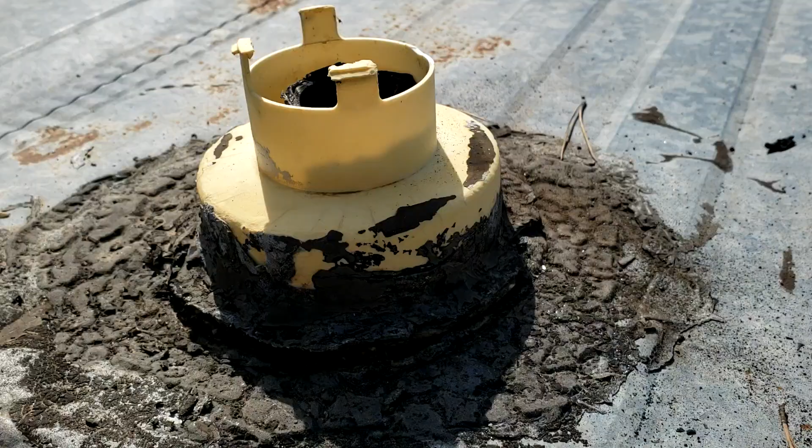First, let's get down into it and see just how big it's going to be. So as I started prying around on it, I learned one thing really quick: the screw holes and everything that was holding it down broke out a long time ago. It was just the sealant holding it down.

So I'm going to get this cleaned up, and in the meantime, while that's getting cleaned up and everything's getting set up, I'm going to take this out there, go into Tinkercad, and redesign it.

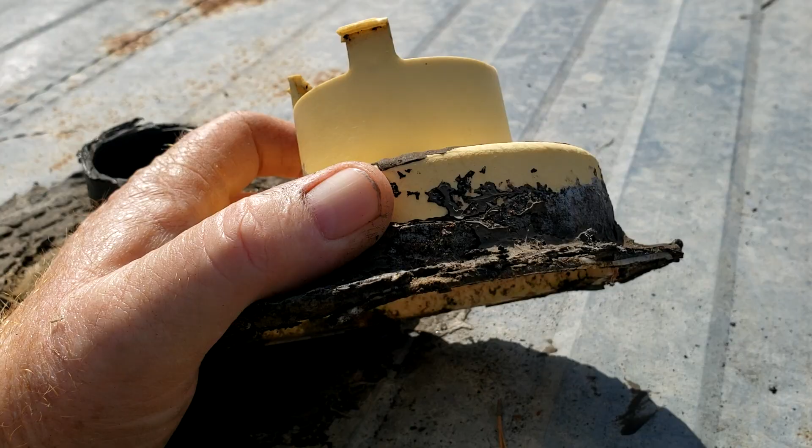So I'm going to go in here and try to redesign this thing. I'm trying a whole different way of recording this, using the screen capture and everything. So let's get into this and try to figure out how to design this in Tinkercad.

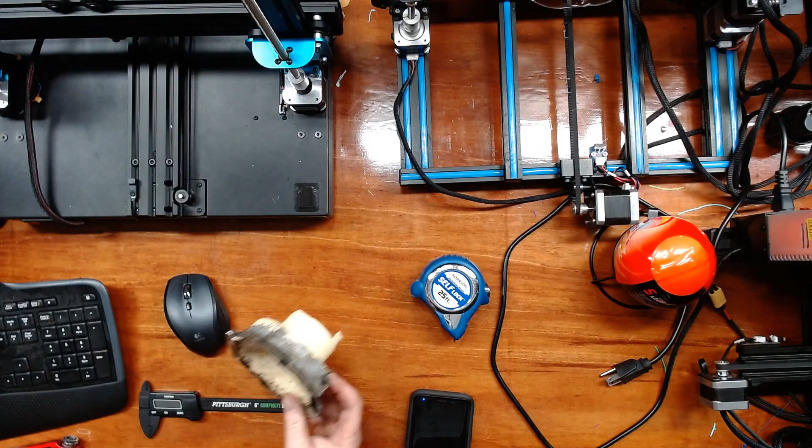So this is the part I'm going to redesign. It used to have a fourth piece sticking up right here, with a cap that clipped down over it. I don't necessarily have to go with that design -- it's just a vent cap is all it is.

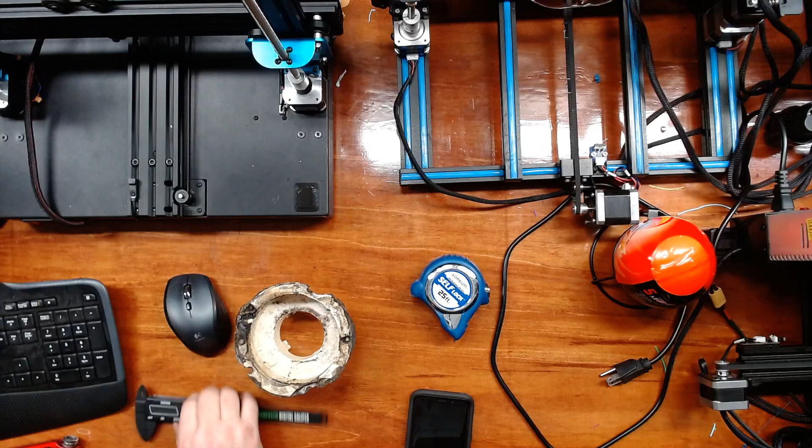So the first thing I've got to do is get some measurements. I'm going to turn on my device here and get a rough estimate. And right now -- oh, that's sacrilege, that's inches. There we go. That should give us a pretty good indication.

So we're right at 135 millimeters across on the base. This portion is 107, 108, doesn't matter. Up here, 64, I believe -- close enough, 64. And then the clips were at 64 as well. And the little bump-outs from what's left of it appear to be about 68.

Main thing is going to be the inside of this right here. You've got to make sure it's big enough for the pipe, which is going to be 60.5 millimeters. So using those measurements, let's go into Tinkercad and see what we can do.

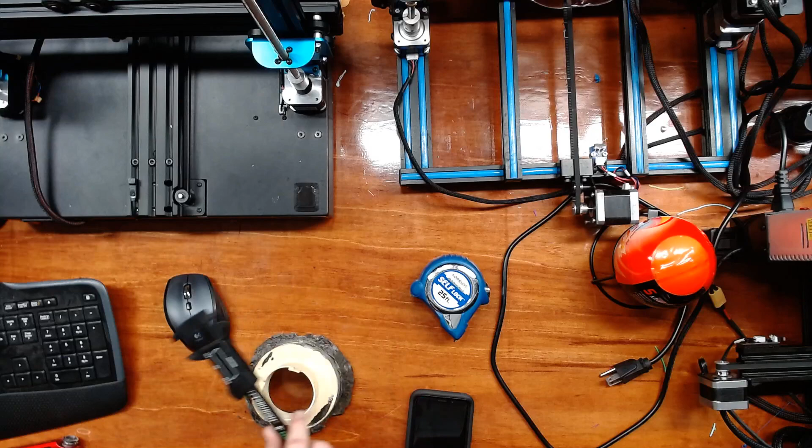Okay, so over here is my favorite program to design everything I do, and that's Tinkercad. It's one of the easiest, simplest ways of doing it. First thing I want to do is, I don't want to get everything complicated, so I'm just going to put down a roof cap.

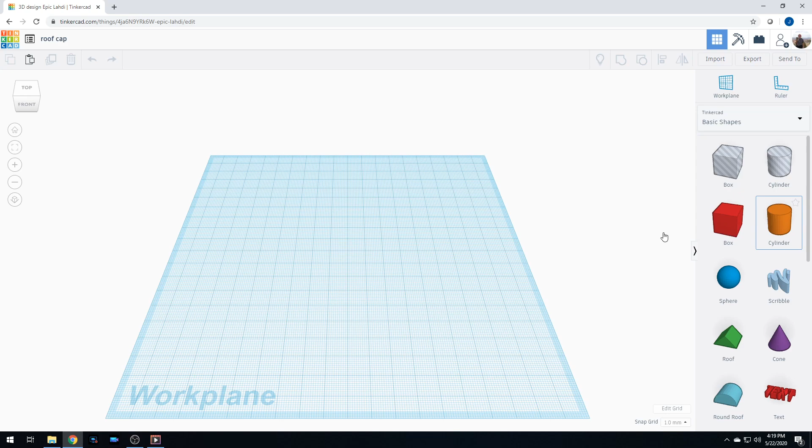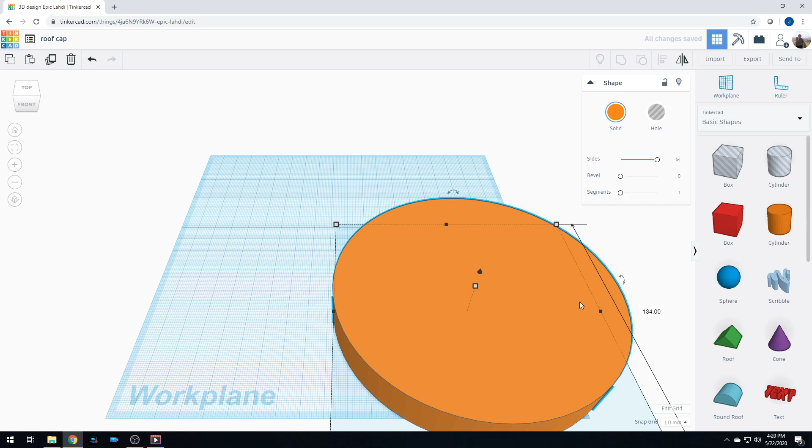There we go. So first thing I'm going to do is start out with the cylinder. We're going to drop it over here. We're going to take this cylinder and give it all the sides so it's nice and round instead of having little beveled edges all over it. So across the base we're going to do it at 134 and 134. By rights I can make it 135, it would not matter.

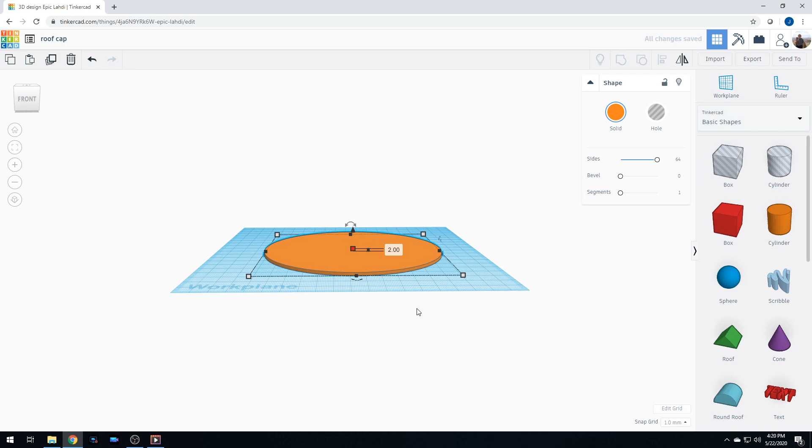We're going to take this and narrow it down -- oh, wrong one. Just put that back to 0. We're going to take this one, drop it down. We're going to need it to be maybe 3 millimeters tall. As far as the thickness, I could actually go less than that -- let's go 2 millimeters. I have a trick I'm going to pull on this, and hopefully that'll make it last a little bit longer in the weather.

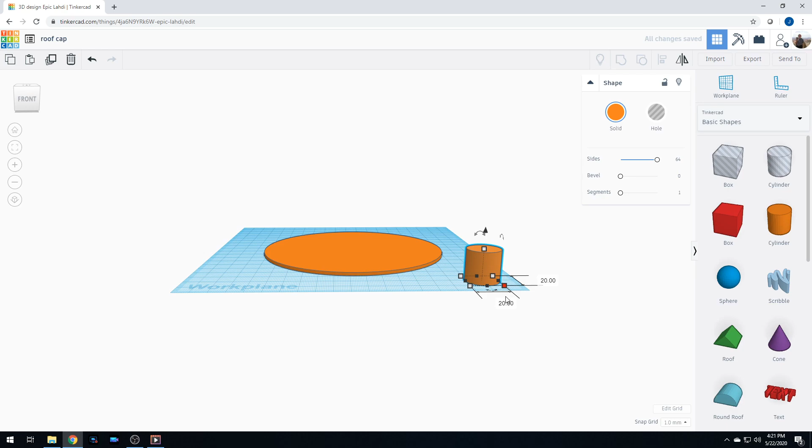Okay, so the next thing we want to do is add the center section. Now the center section is going to have a slight bevel at the top of it, so we have a way we can take care of that. What we're going to do is take this cylinder here, drag it over. Now for that part of it, for the outside, we want it to be 108 millimeters. So once again, we're going to increase our sides to make it smooth -- change that to 108. We're going to bring that over and set that somewhere in the middle. Does not matter at this point.

Right now, I didn't measure the height of it, but let's go ahead and measure the height. Right now I'm sitting at 35 millimeters tall. So we'll take that, 35, and then, actually we've got to remember we've got 3 millimeters -- was it, on thickness? 2 millimeters. So by rights, we need that to be 37.

Nah, that's right, 35. What am I thinking? It doesn't matter because I'm measuring it from the base of it anyway. There we go, 35 millimeters.

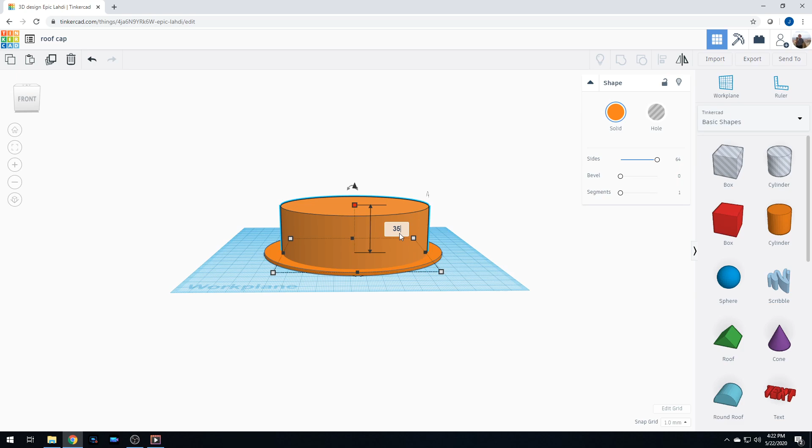Now I want to give this a little bit of a dome. So I can either add another part in here, or I can just select on that. I believe if I do bevel, I can create a dome. Now by doing that, you can see this little blue line here means I'm no longer where I'm supposed to be on that. So because of that, I am going to go 37 millimeters, and then I'm going to drop this down a couple of millimeters.

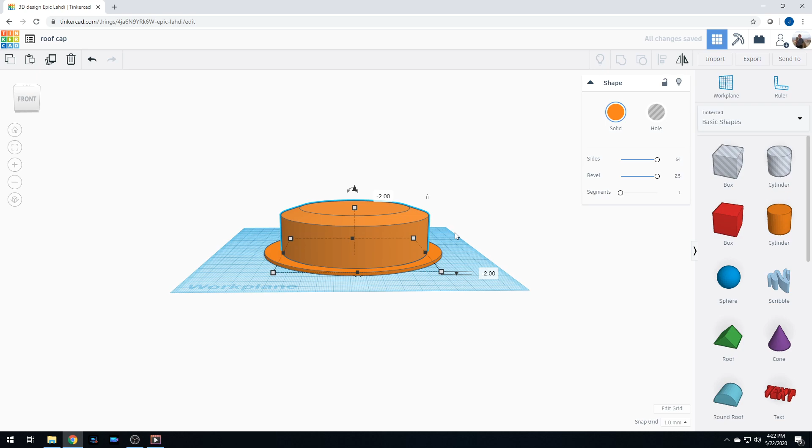Later on, I'm going to put something underneath here to completely flatten it. But that gives it a little bit of bevel. It's probably not enough, I don't know. Let's find out whenever I put my other piece on there, which is supposed to be 64 millimeters.

So I'm going to take another cylinder. This one, well first let's go ahead and do our sides. 64, 64. Once again, this is all millimeters. From bottom to top, 66 millimeters tall. So I'm going to take this,

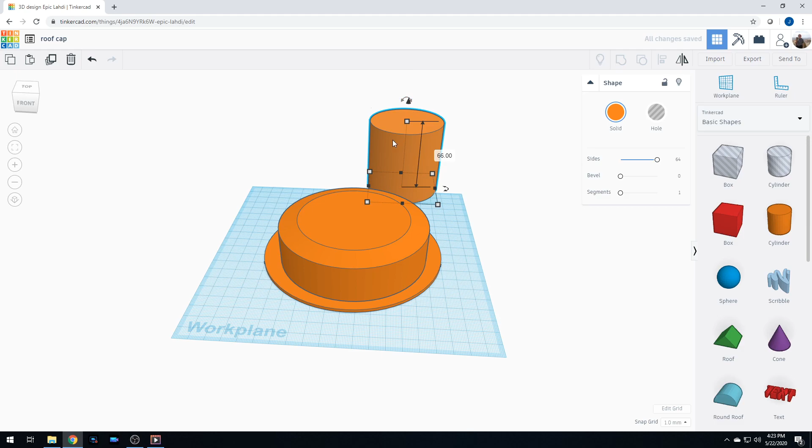66 millimeters, I'm going to bring that over here into the center. That's actually not bad. Now what we're going to do is we're going to line everything up. Now at this point, I've got a wedding cake. That's not what I want. I don't want a wedding cake.

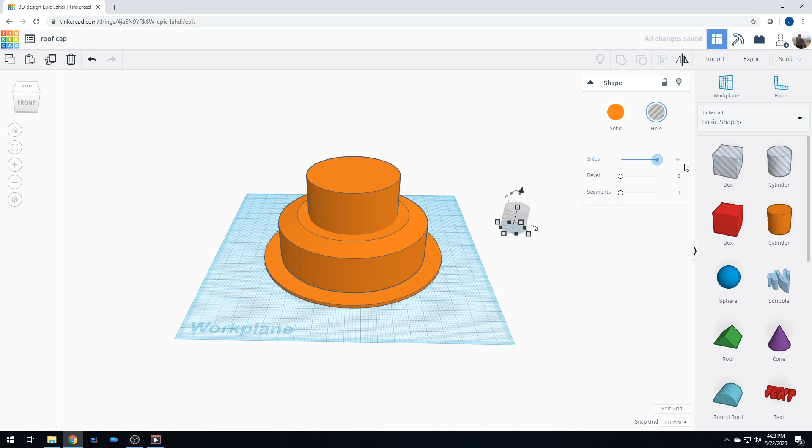So what I'm going to do is I'm going to take and hollow this thing out. Now for the inside of the top portion of it, it's about 60 millimeters. So I'm going to take a hollow cylinder. I'm going to once again round off all the sides. Let's do it 60, let's just go 61 and see what that looks like. 61, make it tall, we're going to stick it in the middle.

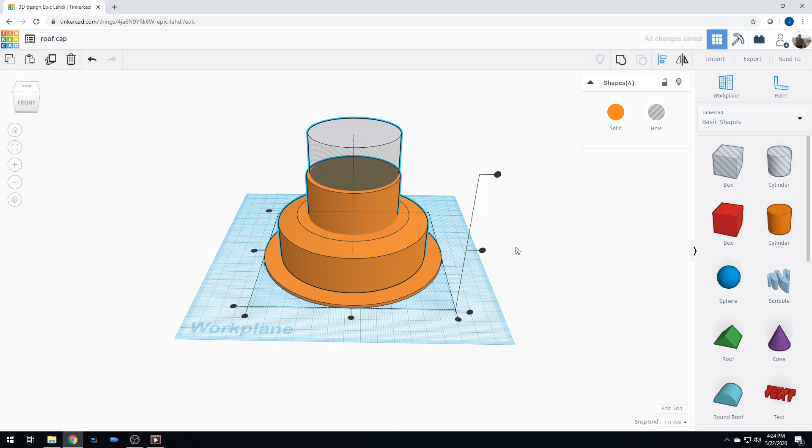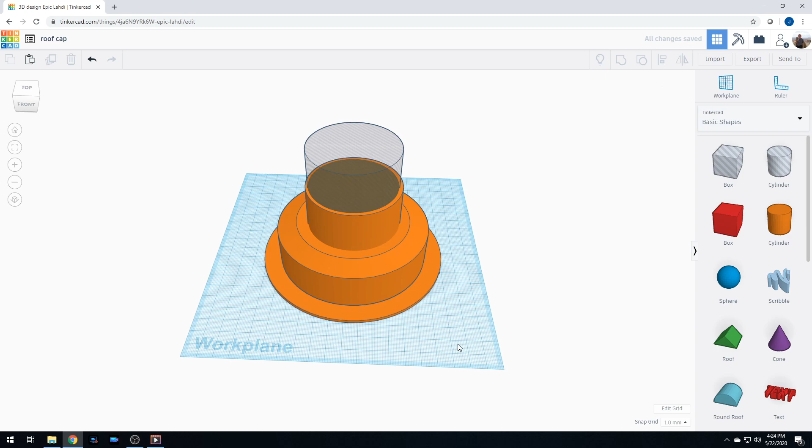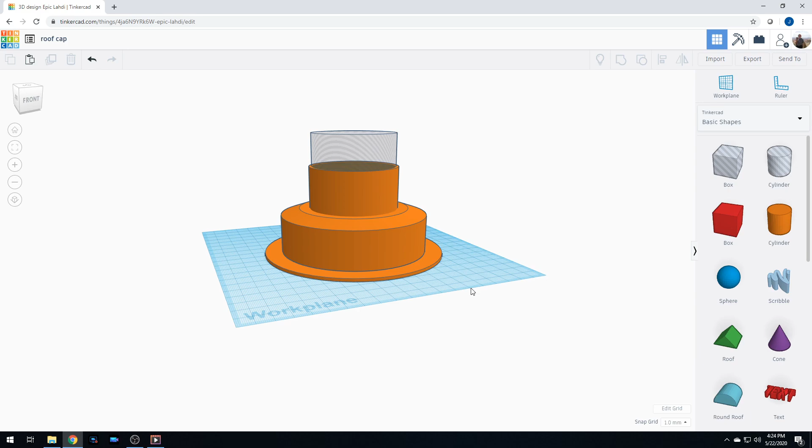And then I can take this, drop it down a little bit so it goes underneath, and now it's sticking out the bottom of the build plate. The build volume, or however you want to say it. Not the build plate, but on this is the work plane, I guess you call it.

So the next thing I want to do is I want to go ahead bigger. Why, I really don't know, because technically it's going to slide over the pipe, but for intents and purposes, we're just going to go ahead and do that. So this piece was what? 108. So we're going to double check the measurement inside this one, and this one on the inside is 104.

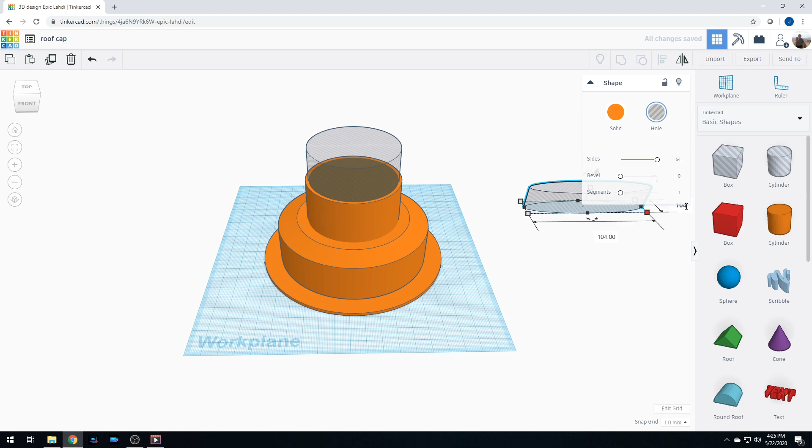104 and 104. We're going to take that over here. This is where I'm just going to take this and eyeball it. We're going to bring it about there, drop it down a little bit, remembering that we got to make sure we're completely through, that we're punching a hole all the way through this thing. That looks good to me.

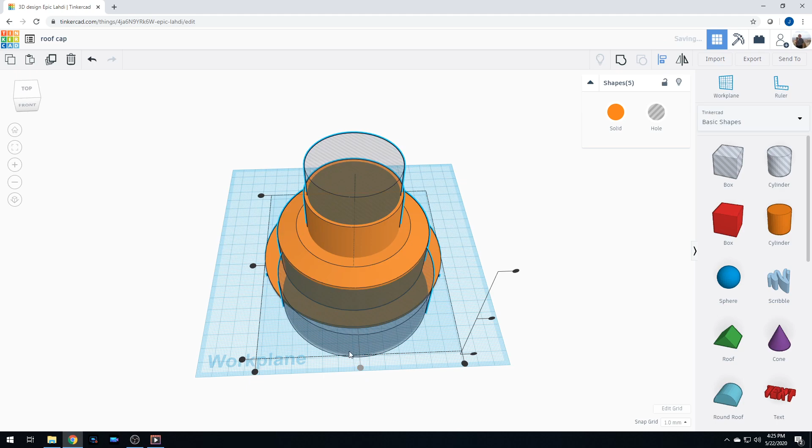We're going to take and align everything, and by aligning everything, it puts it exactly where we want it. Now when we look in there, there we are. Now if we want to see how much area there is between them, we can actually turn this outside hollow. See this width right here? That's our thickness of that material, which to me is just fine.

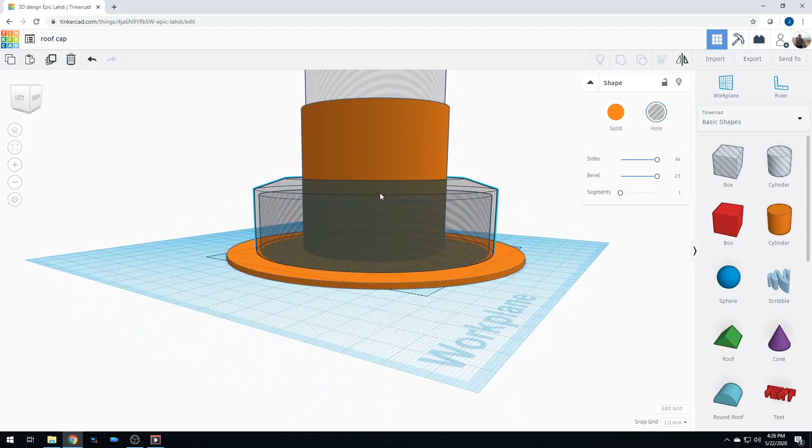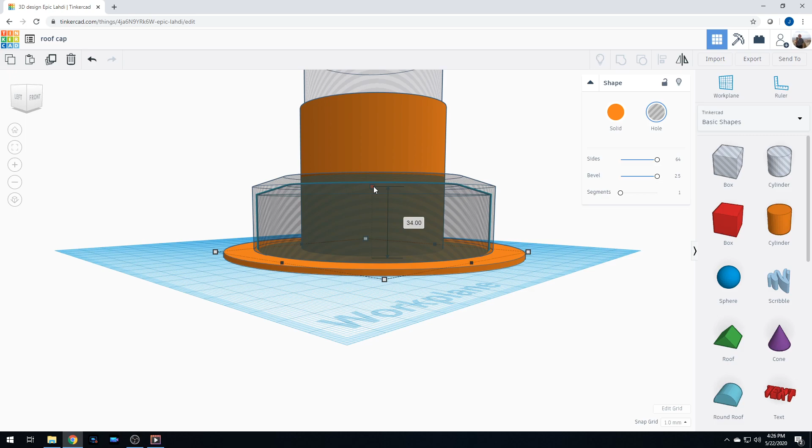As you can see, there's going to be more material under here. Now what I can do is I can take that piece and I can bevel it. And by beveling it, it's going to give it the same taper on the inside, which means now I'm going to just extend this back up to give it somewhat the same thickness. It's going to be a little bit thicker than the sides, which is fine. I like that, that looks sweet to me.

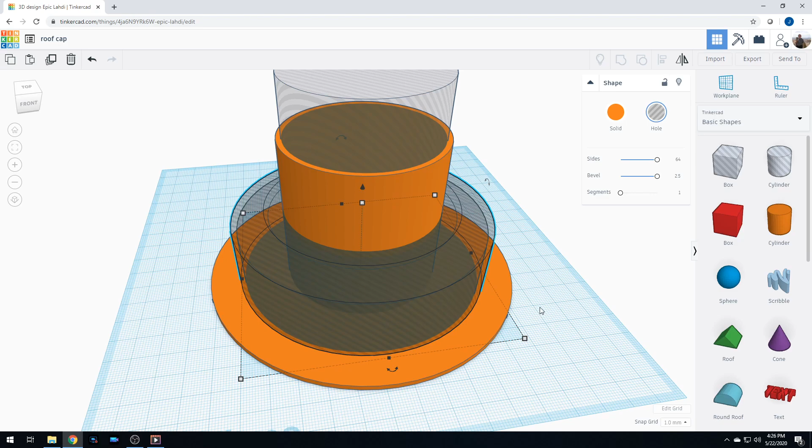Okay, so I'm just going to click this outside because once again the hole's on the inside, which I got to make sure I'm all the way through, which I shouldn't be. Am I? That's easy enough to fix. I can change that to 39. Nope, wrong one. When in doubt, just go back. Click down here.

That will give me that one, so I can go 39. See how it went up? I just want to bring it back down. Give myself about the same amount there. Should be good with that thickness.

It's going to be a nice thick part. PLA doesn't last very long in weather from what I understand, but I got a trick up my sleeve I'm going to try on this.

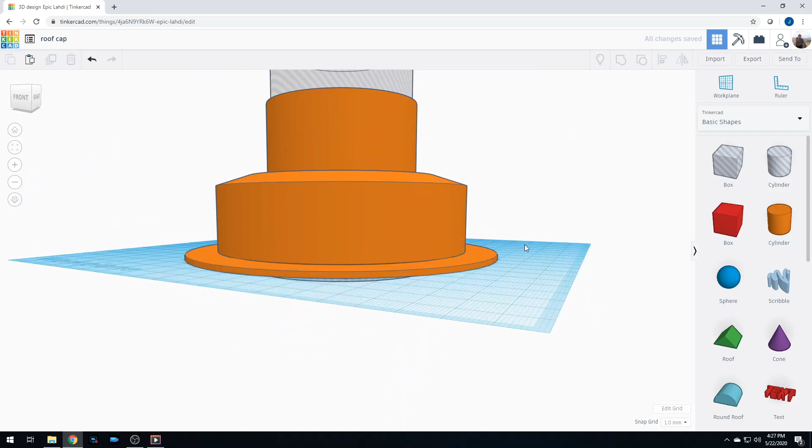Okay, so with that set, I can click this outside one, turn it back into a solid. I've got my hole right there. I'm all good on that. All I need to do now is take a box. We're going to take this box and we're going to extend it out pretty big. Doesn't really matter.

All this is going to do is set below my build plane so that it creates a flat surface, so that when I bring it into my slicer, it's not going to think it's some special thing. I just want to make sure it's at 0, so it's at the bottom of the part. So right now I'm just going to take all this and I'm going to join it.

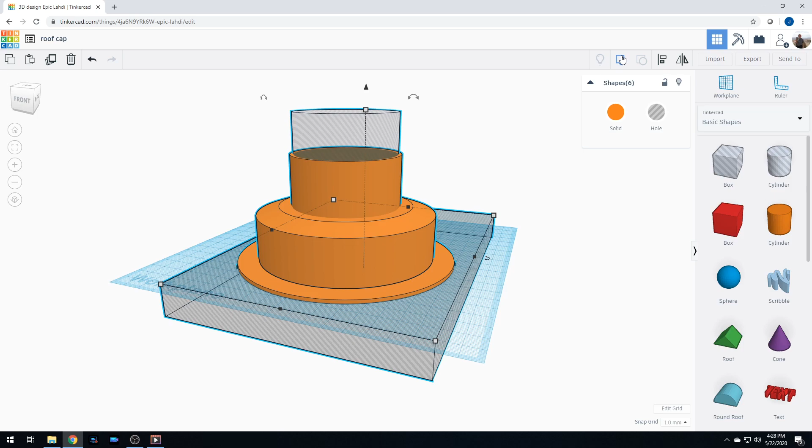Group it. So now you can see what I'm fixing here. That's somewhat like what I've got. And top to bottom, 66 millimeters. Now what I don't have yet are the tabs right here.

So now let's go ahead and play with the tabs. Okay, so the next thing is we want to go ahead and make the tabs, but I'm starting to have my doubts about whether I can do it. And since I really don't need tabs, all I need is just the cap to fit on this thing. But I just need it so it can get air.

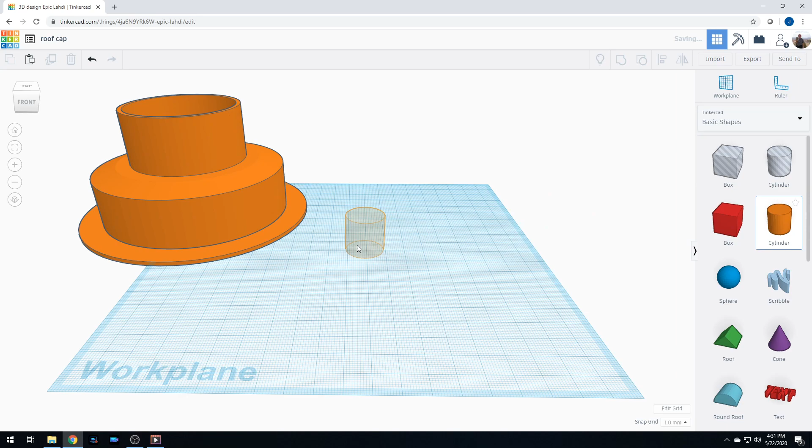Let's just go ahead and make the cap. Just push this off over here to the side. Let's go ahead and make a cap that'll fit this thing. And since I don't have a cap to go by, we're just going to go by whatever we think is going to be alright. I'm going to go ahead and give it a taper, a bevel. And so the outside of the whole thing was...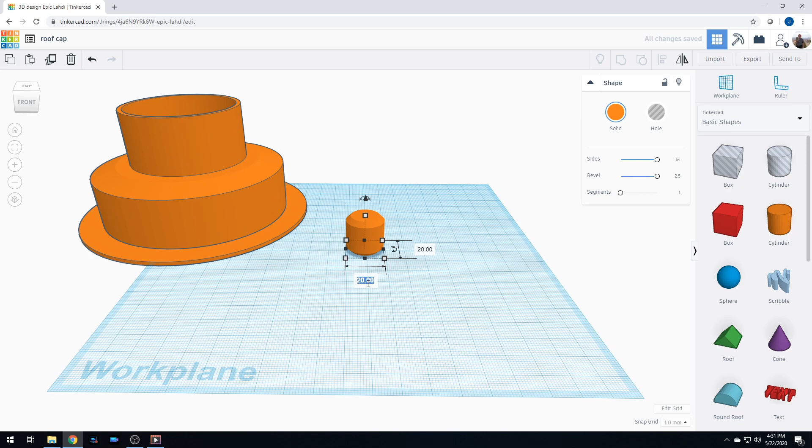My thing's turned off, let me turn them back on. I believe this is 108. Yeah, this is 108. So let's go ahead and do 108 by 108.

It's probably a little bit too big by rights. Yeah, it is too big. Let's narrow that down. Let's go 100.

Not that that's going to be tremendously smaller. I just want to see how it looks on here. Okay. At one time that's probably what it looked like. Something like that. So let's bring that back down to 0.

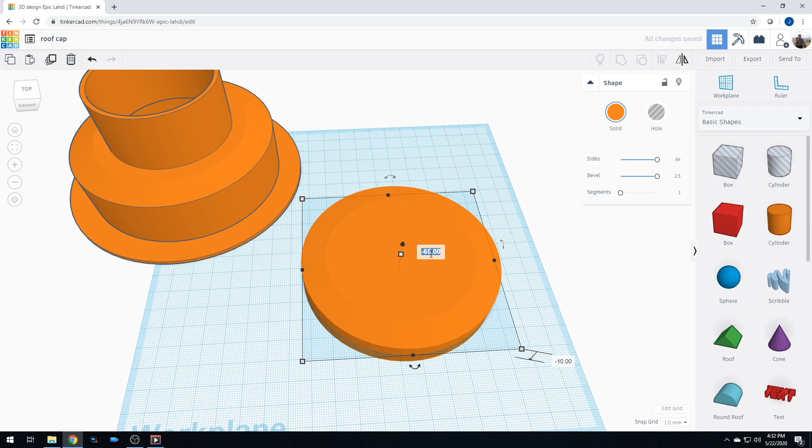Oh, come on. There, bring it back down to the build plate. There we go.

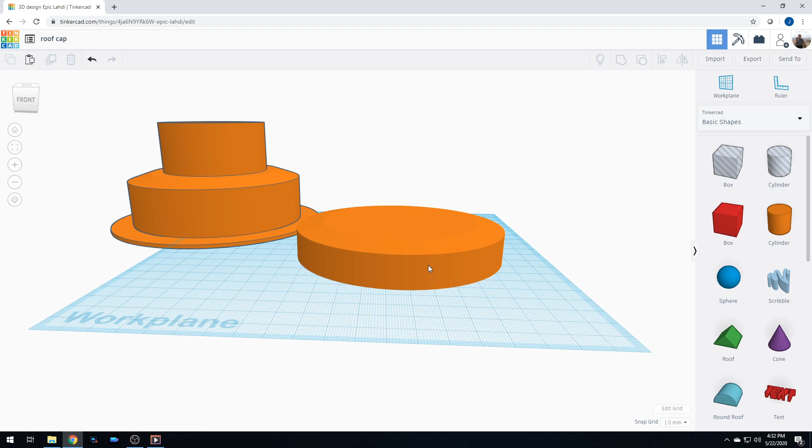So I think what I'm going to do, I'm actually going to make this a little bit taller. I'm going to make it about 30 millimeters tall. And then I'm going to put a hole in this thing. It's going to be slightly bigger than the 64 millimeters. So we're actually going to make that hole...

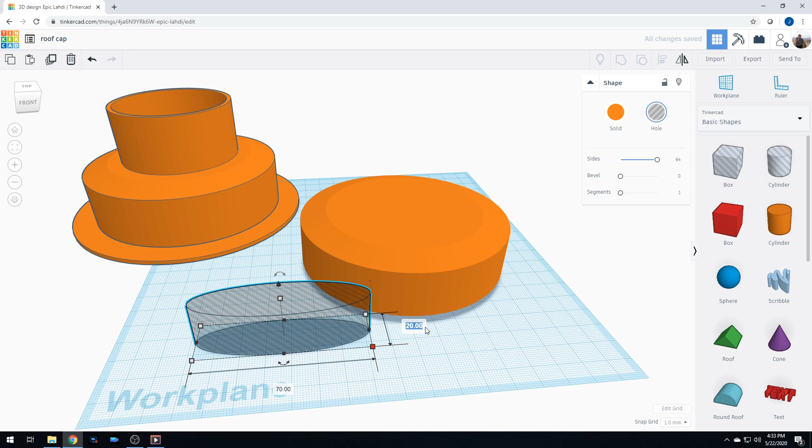Come on, there we go. We're going to make it 70 millimeters by 70. We may end up making it bigger than that.

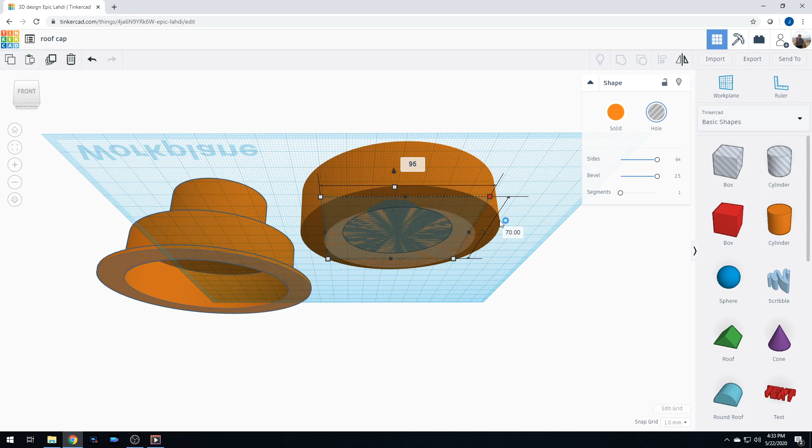Oh yeah, let's go ahead and bevel that thing. Just for... yeah, it doesn't need to be that, it does not need to be like that. What was this one? This one was 100, so let's make that one 95 and 95. And then we're going to group or align it.

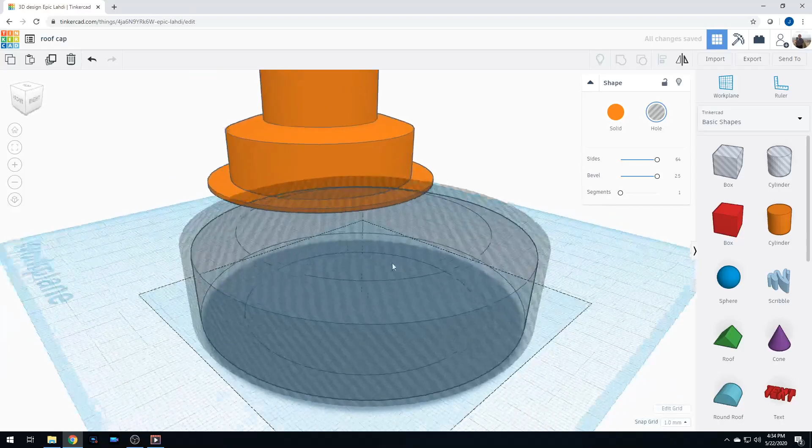Let's turn that into a hole, see where we're at. It's going to be a nice heavy duty cap right there. Okay, that's doable. I like that. So let's go ahead and turn that back into a solid.

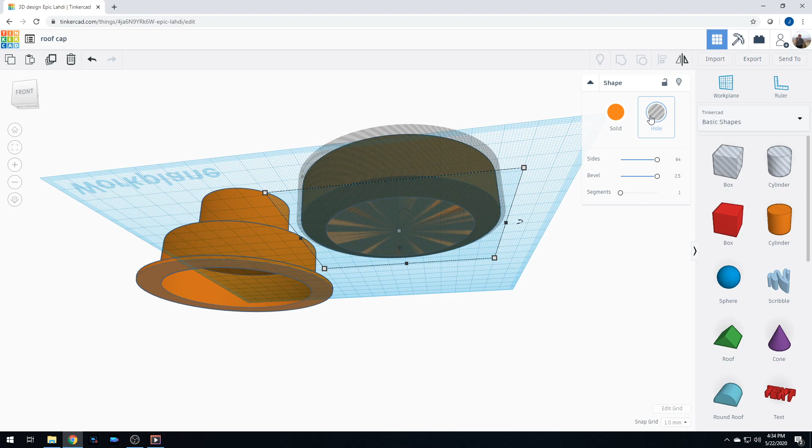Oh, wrong piece got turned into the solid. That would be bad. Hole. Uh-oh. Oh no, that's easy fixed. Click the outside, bring it up, touch that part, turn it into a hole.

Take that, bring it back down. Now that's the inside I'm taking down. Back down to 0. Click the outside, bring it back down to 0. Nope, just want to do that part. Make sure that we're even, which we are because everything's grayed out. Turn the outside back into a solid.

What in the world's going on here? Why is it doing that? You're a hole, you're a solid. Go back home. There, now you can be happy.

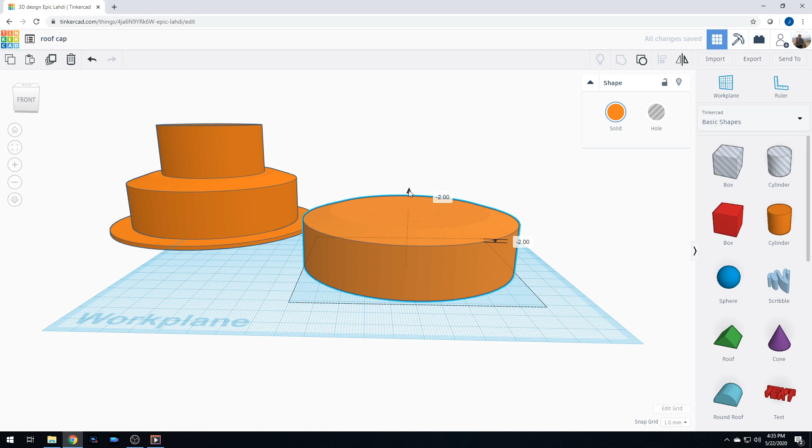So we're going to go ahead and take this, go ahead and group it really quick. We're going to drop that down even with the build. Let's see, let's take it down a little bit further. There, that'll work because I want to go ahead and flatten that bottom on it.

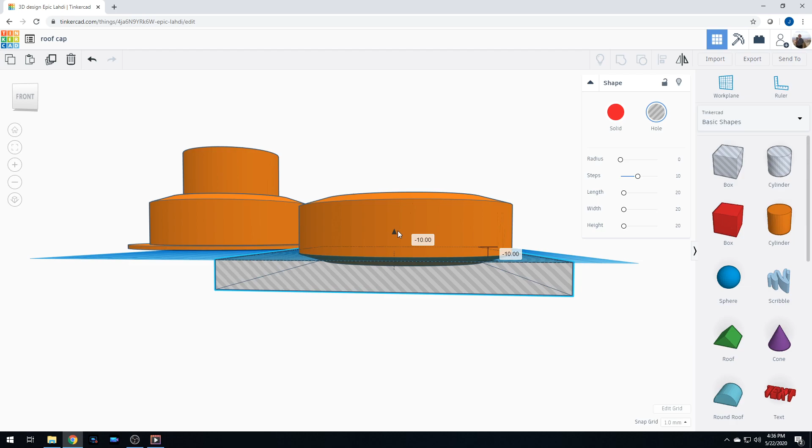Ever have one of those days? There, I think that worked.

That looks like it's even. So now we'll go ahead and group. Now we're nice and flat.

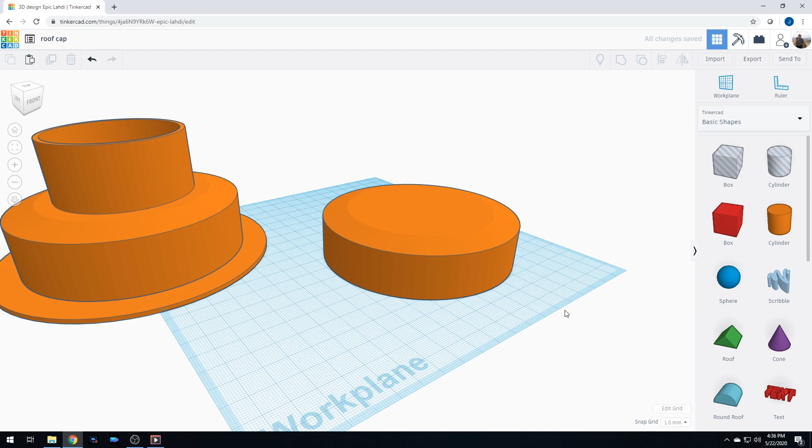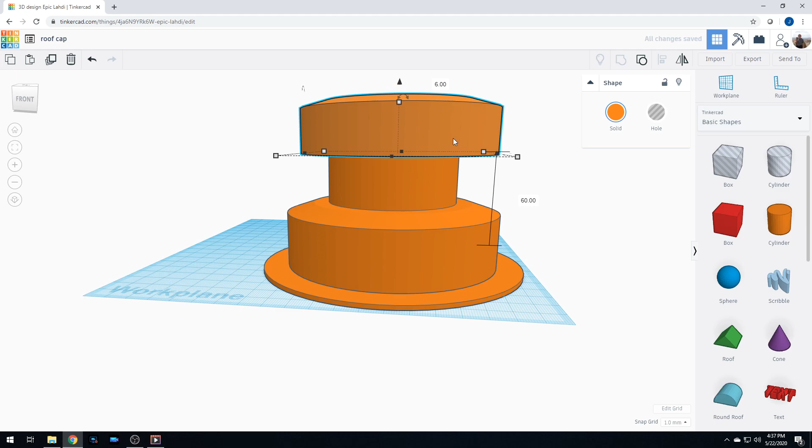That will work. Okay, so now I've got a cap. I've got this piece here, but now I need to make sure that the cap is high enough so that it can get air. So I'm just going to center those pieces there, and now we're going to work on making the cap. Actually, it might be better if I just do it this way, so you can see how much air.

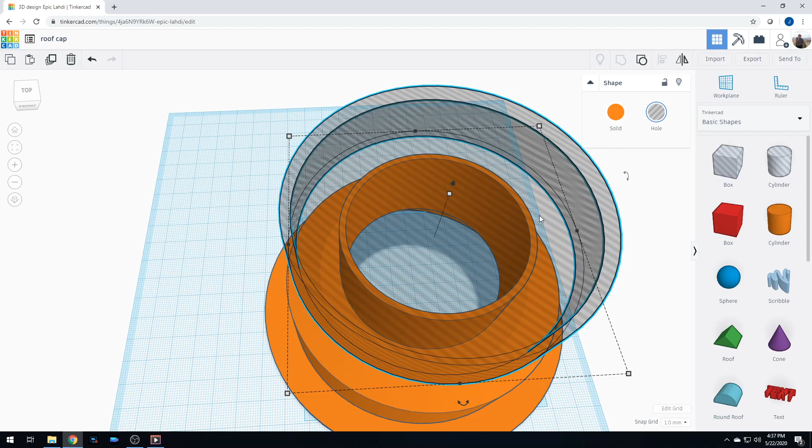When you look right here, you see this nice clear gap right here. That's how much air gap there is between it and that, and you can see where it is compared to the top. By rights, I can bring this down just a hair further. I honestly don't know why I need to, except to keep water out of my house. Anyway, you get the gist of it.

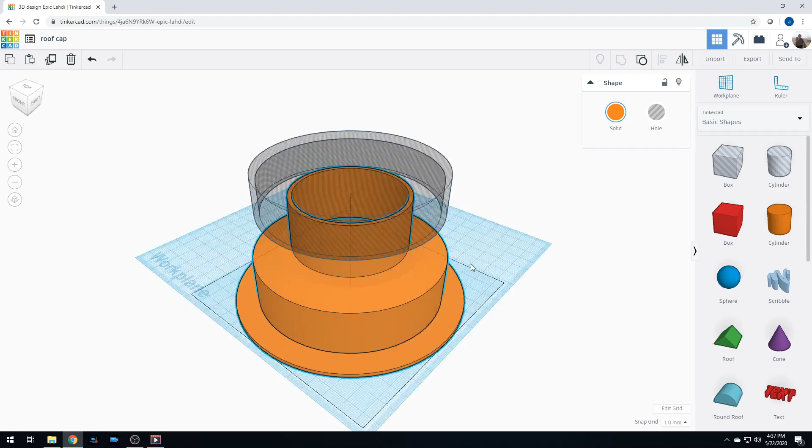So now what I want to do is I want to go ahead and create something in here to make sure it stays in position, because I'm not going to use those tabs. So what I'm going to do is take a box. We're going to make this box nice and thin, like 4 millimeters, and we're going to extend it out.

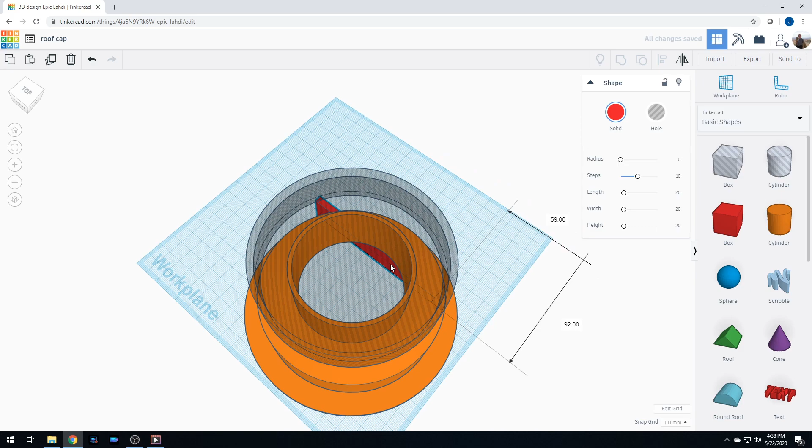And I'm going to figure out a way of bringing it up in here and across. Nope, wrong thing. Yeah, when in doubt, just use the align buttons. It's so much easier.

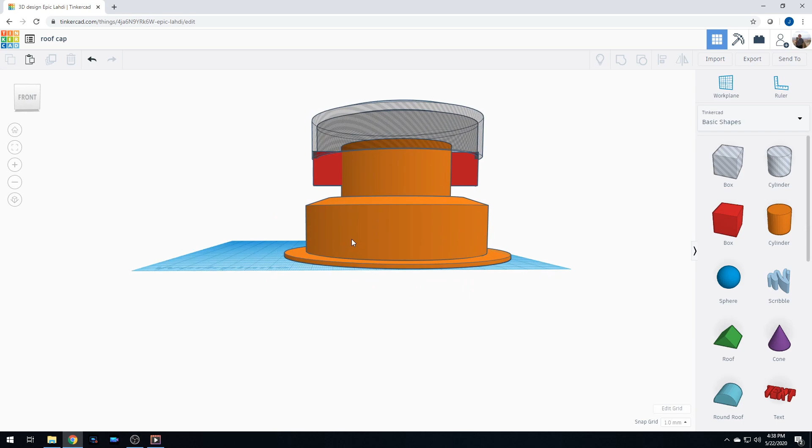So the question is, do I stick out past? Which actually I don't, surprisingly. I don't know how that happened. So if I do it that way, it actually will work. Well, that's strange that worked on the first try.

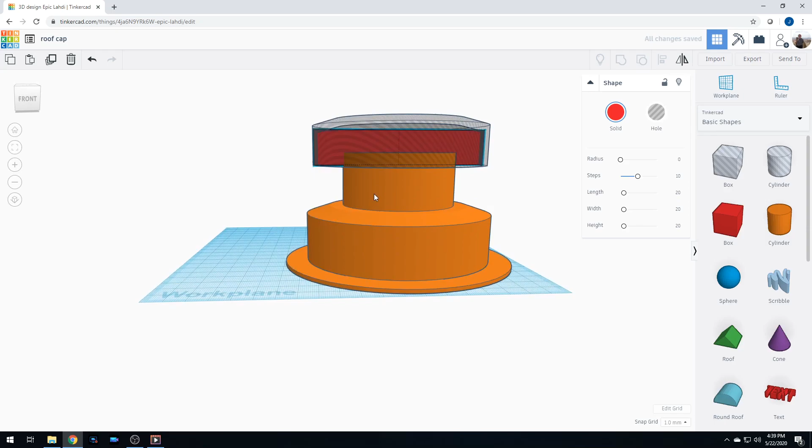Let's actually go ahead and bring it up a little bit. We're actually even with that. Don't really need to do it like this. Actually, no, I don't want to do it like this, do I? That might actually be sweet, though, watching it on time lapse. I think I will do it like that.

And then I'm going to copy it. And then I'm going to rotate it. Oh, let's go back. Let's click that. Copy. Oh yeah, I forgot to paste. Why did I paste there? That's stupid.

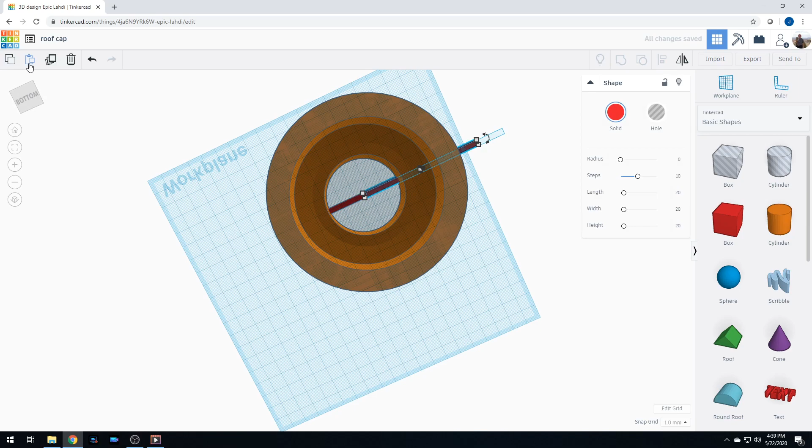Ah, that's weird. Okay, fine. Line there and there. Okay, I'm going to take one of these, I don't know which one it is, and we're going to go 90 degrees.

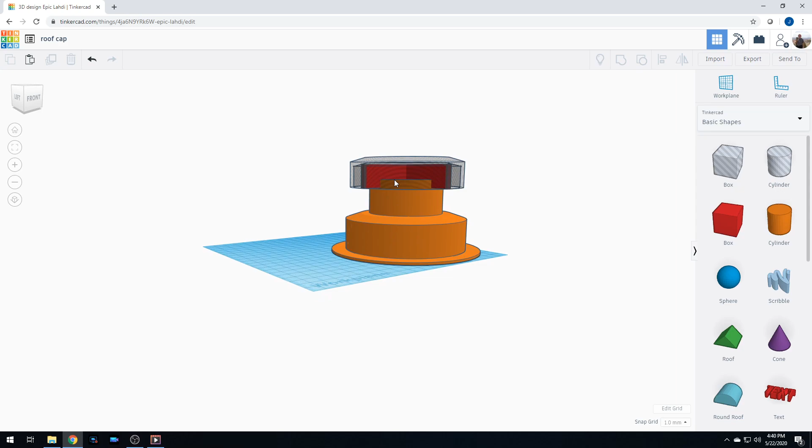That gives me enough air getting in there, no problem at all. With it down at the edge of this, when it prints, I honestly don't know. But you know what I can do is I can just leave it like that and print it upside down. I do have a taper here that might work.

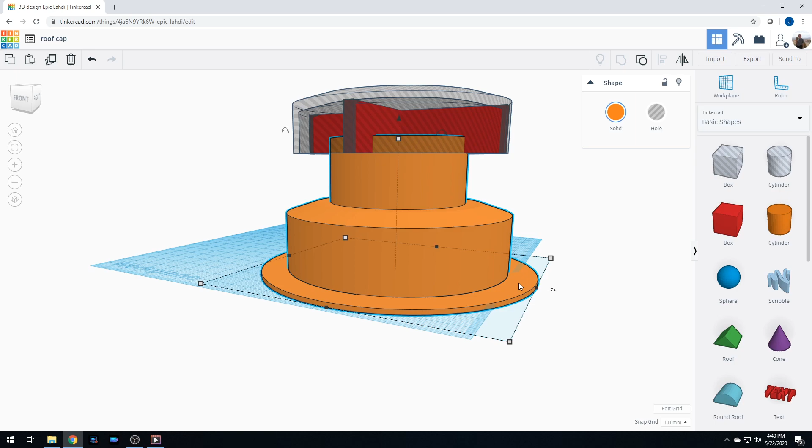I don't have a taper there. I wonder if I could have tapered that. I don't know. I do know this much on this. I've got those way too thick. Those only need to be 2 millimeters.

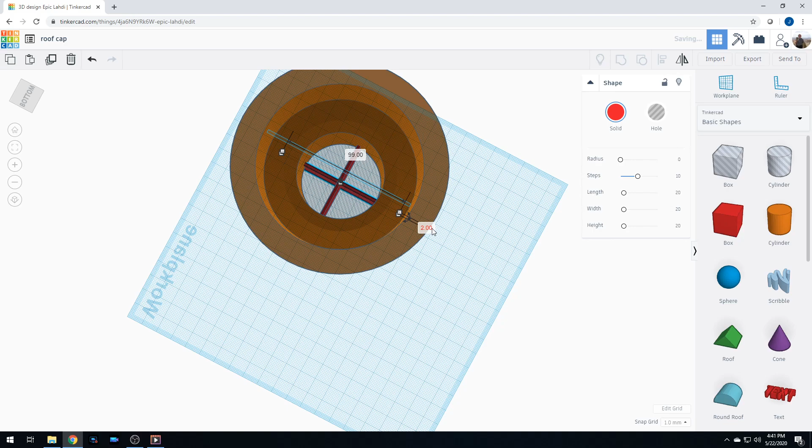There we go, nice and thin. Make sure everything's aligned. That looks stinking sweet. That may just work.

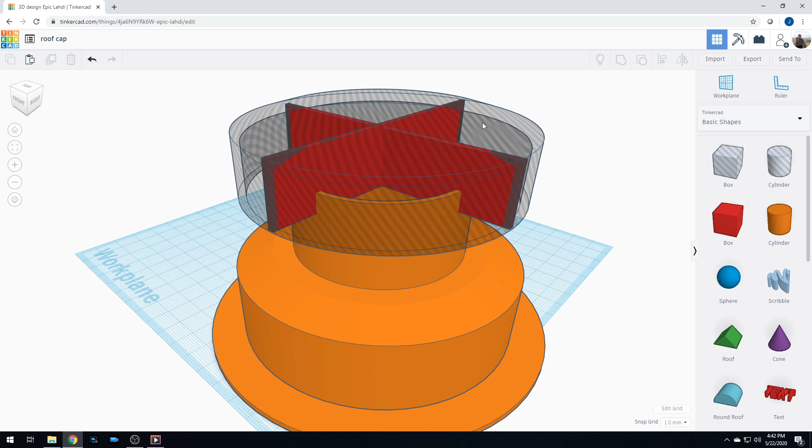So I'll raise that up a little bit more. It's just going to touch, so that way when it starts bridging around there, it should touch on the top of those. That'll be sweet. Cool. Okay guys, I'm going to go ahead and download this monstrosity.

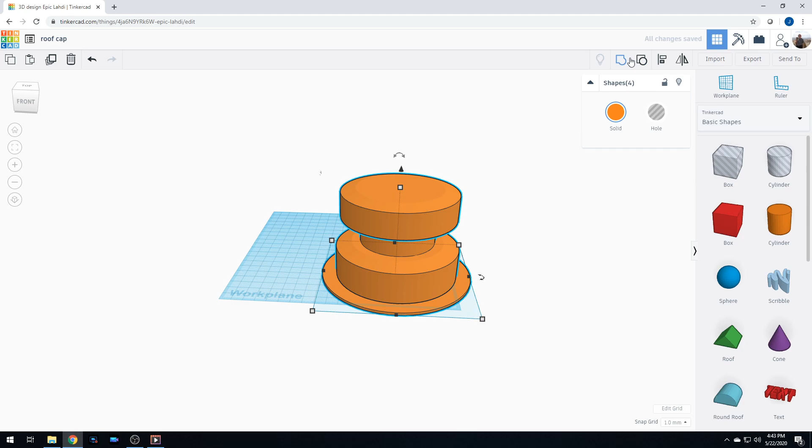Oh no, no! Align, align, align now. Group. Now I've got a part that's 85 millimeters tall. Yes, okay, I like it. Let's go ahead and give it a shot. I'll see you guys at the end of the time lapse.

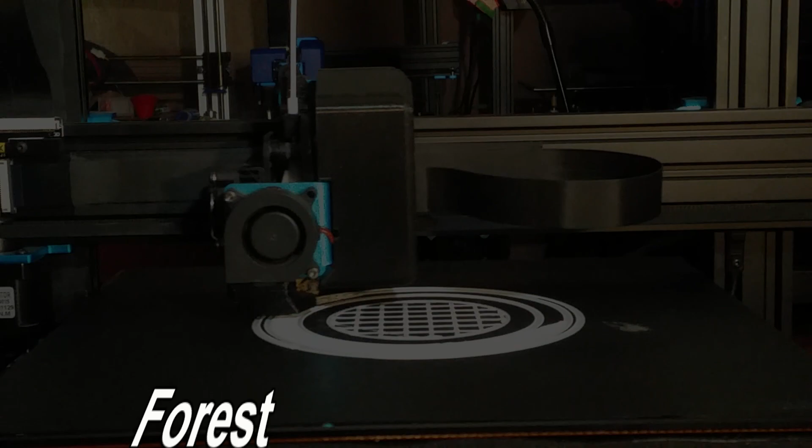Full disclosure, this is not the actual print. This was the one previous to the final version of it. Messed up on the support settings on this, but that's the only footage I have because my other footage got corrupted during the print. Sorry about that, guys. So I'll see you at the end of it.

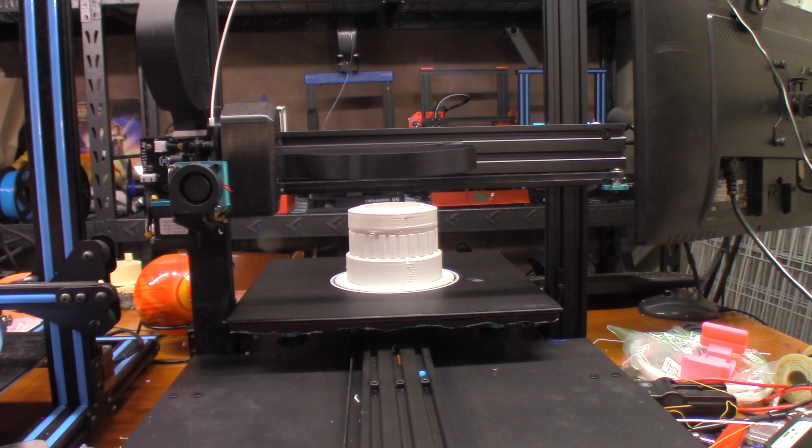Okay, hopefully this is the fourth and last one. I started out with this one, didn't do it with supports, and it failed pretty bad, so I ended that print. Then I decided to print upside down, do it with supports, but whatever cure I used made the support so beefy I couldn't remove it. I tried it again, and once again the supports had this extra wall to it. I don't understand that, so I went back into Cura and I think I got it fixed.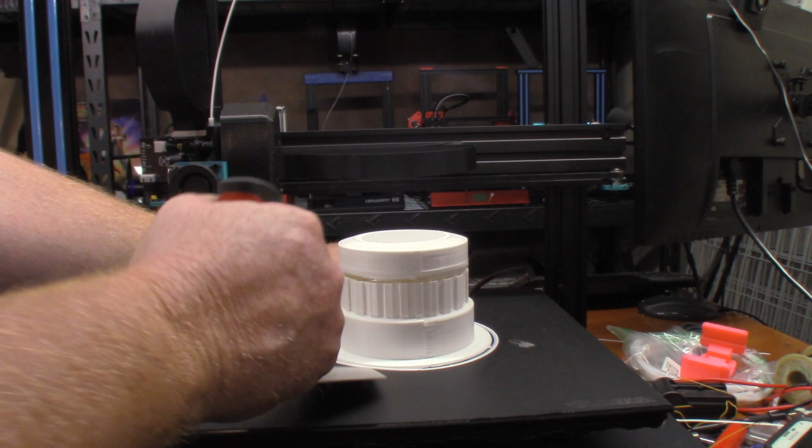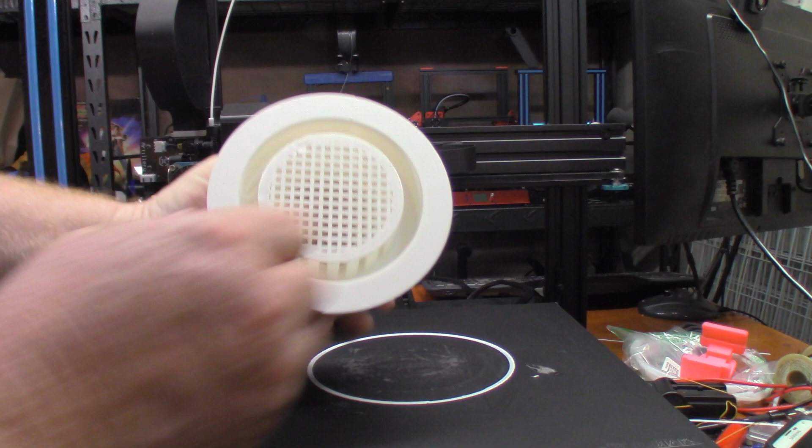I went with zigzag supports, and where it connects, I think that's where that outer wall came from. Okay, so that support is removing a whole lot easier. Let's see if I can remove this support without damaging the print.

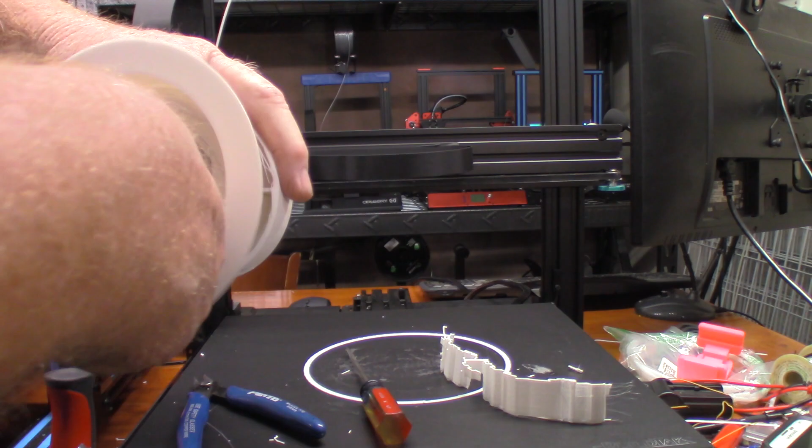Okay, I got the rest of the support material pulled out. I'm just going to run this around it to cut off the little strings. My main thing is just to make sure it doesn't get rained on to where water can get through the roof. I want it to look somewhat like the original, but it doesn't have to be exact. Got all the strings out of it. So now, didn't do the greatest job of bridging over the support there.

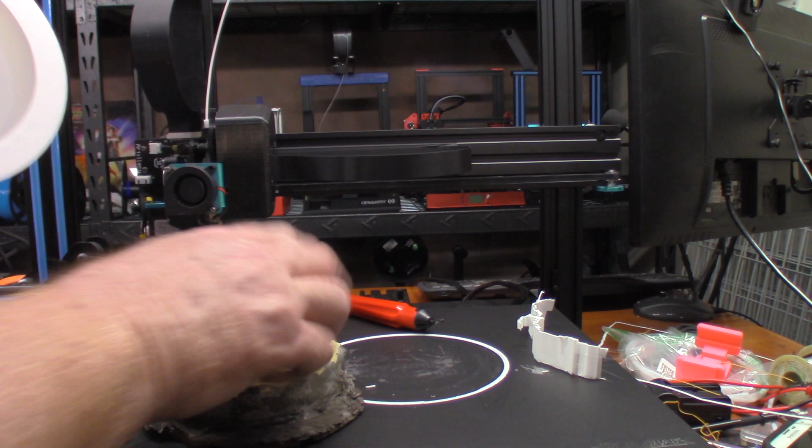It's a little bit nasty looking, but that's alright. Outside of it, you can see it wasn't the greatest. I need to play with the retraction settings a little more, but for what I need, this is going to work just right. So my next job - oh yeah, by the way, this is how it stacks up against the original. If this had the cap on it, it would have been about the same height. So size-wise, I think we're going to be good.

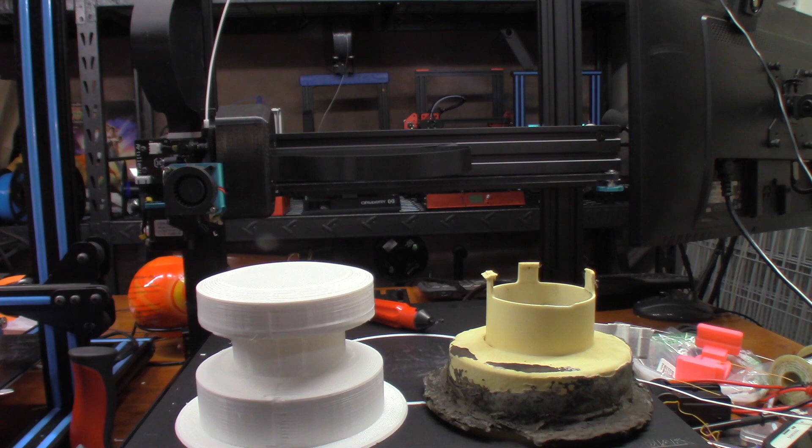Okay, so now the next thing we'll do, I'm going to take it out, hit it with some of this Flex Seal. That way it'll make it weatherproof, hopefully make it last a few years. And I think we should be good. So let's go out there and give it a quick spray.

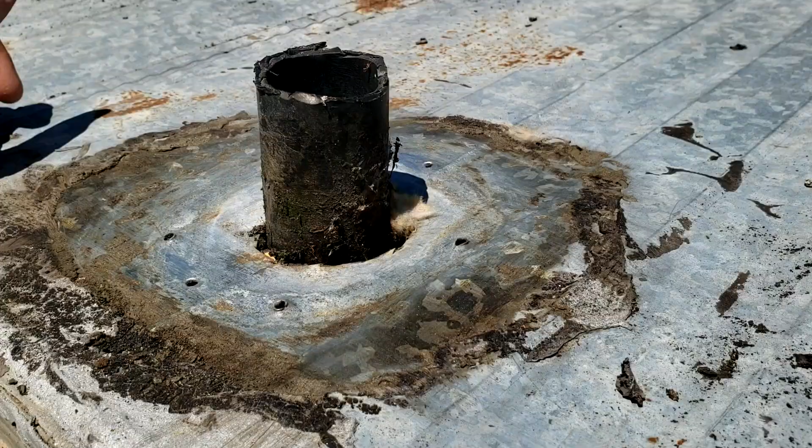So in the meantime, I've gone ahead and cleaned this off. I got it all peeled off and wire brushed it down to the bare metal. In the RV and mobile home world, they like using this stuff. So I got all that scraped off of it and all the tar or whatever else was around it. So now let's go ahead and see if we can seal it off.

I'm not going to reuse the screws, and I'm not going to screw it down. I'm actually going to use an adhesive/silicone to seal it. I think that way it'll just glue it down and should seal it up for good. So this is what I'm going to use today, the DynaFlex Ultra. It's going to be a black color - actually looks more gray than anything.

Anyway, I'm going to take it, put some on here, stick it around there. Actually, let's see, make sure our ring fits over everything here.

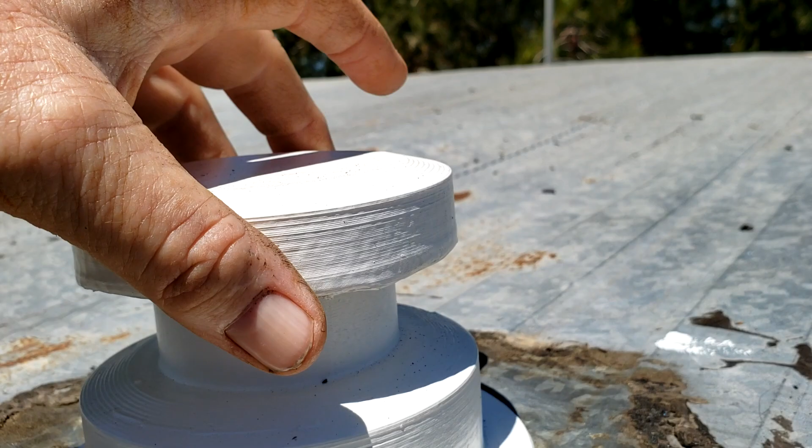So I've miscalculated one little thing - this pipe comes up and hits that little cross section right there. But actually there's a way I can fix that. Let me fix it really quick here, because this pipe isn't even anyway, so I'm just going to slice it off a little bit. There we go. And now this will fit right down.

No problem at all. So let's go ahead and get the sealant on it, see how it does. And from what I can tell, all the screw holes are all covered up. Nice, okay, let's get the sealant on it.

I know that's probably not the best way of doing it, but let's see how it works. I'm just going to take this and set her over. Beautiful. Squish it down really good, let it settle back in place, and then I'll put another bead around it. Actually, I'll probably just take it and bring it right around it. I'll probably put another bead around it after it dries. But yeah, that's going to do the trick really nice.

Cool, anyway guys, there it is. It's looking good, I don't see any problems with it. If you're interested in seeing how it holds up, hit me up in the comments below. Let me know if you'd be interested in a video in about 6 or 8 months just to see how it held up during the summertime. If it holds up this summer, I think it'll be just fine.